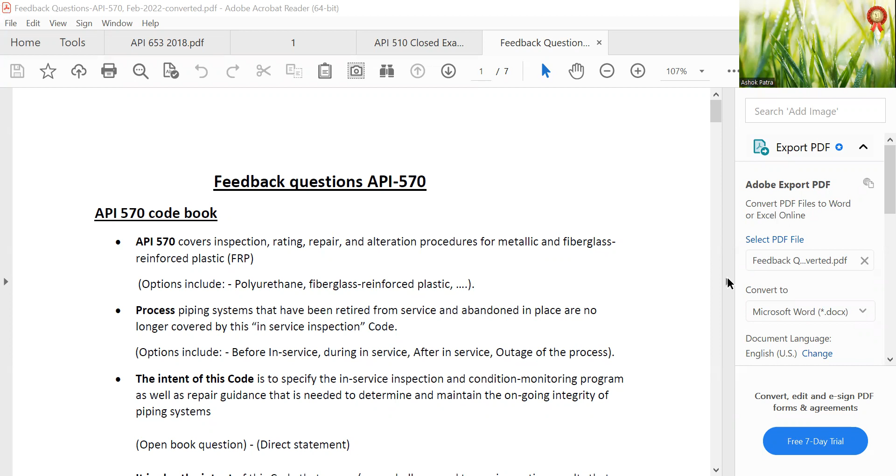API 570 covers inspection, rating, repair, and alteration procedures for metallic and fiberglass reinforced plastic piping. Options include polyurethane fiberglass reinforced plastic process piping systems that have been retired from service and abandoned in place are no longer covered by this in-service inspection code.

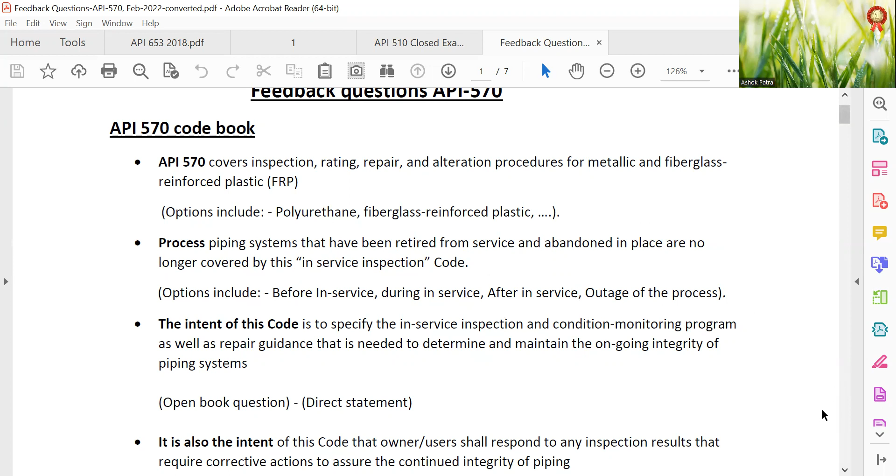Options include before in service, during in service, after in service, and outage of the process. The intent of this code is to specify the in-service inspection and condition monitoring program, as well as repair guidance needed to determine and maintain the ongoing integrity of the piping system.

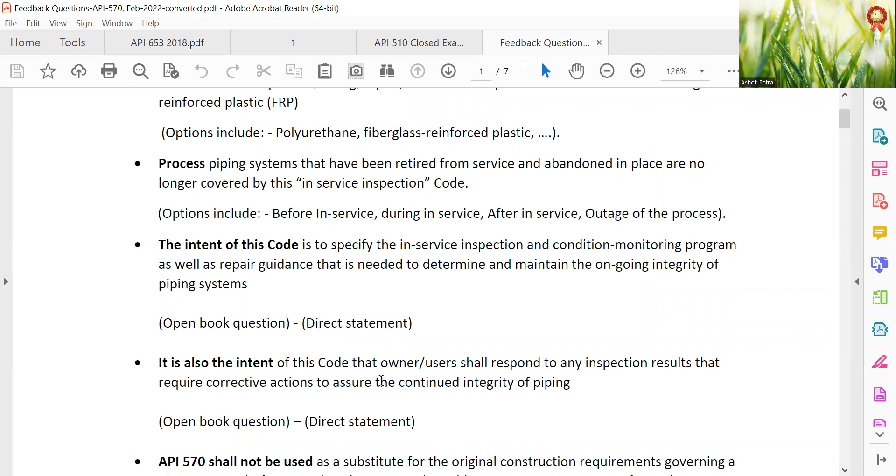Open book question, direct statement. It is also the intent of this code that the owner user shall respond to any inspection results that require corrective actions to assure the continued integrity of piping.

API 570 shall not be used as a substitute for the original construction requirements governing a piping system before it is placed in service. Possibly 2 or 3 questions in the same format. Options include ASME Section VIII-1 construction code, ASME PCC2, API 579-1 repair construction code, and B31.3 applicable construction code.

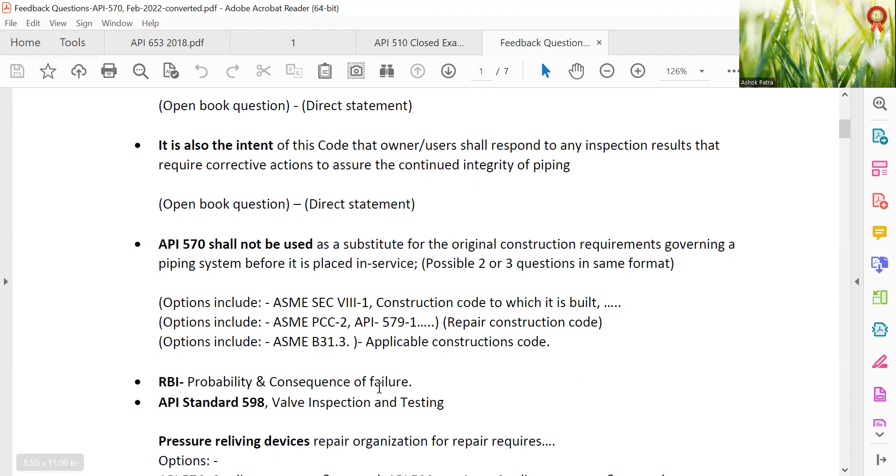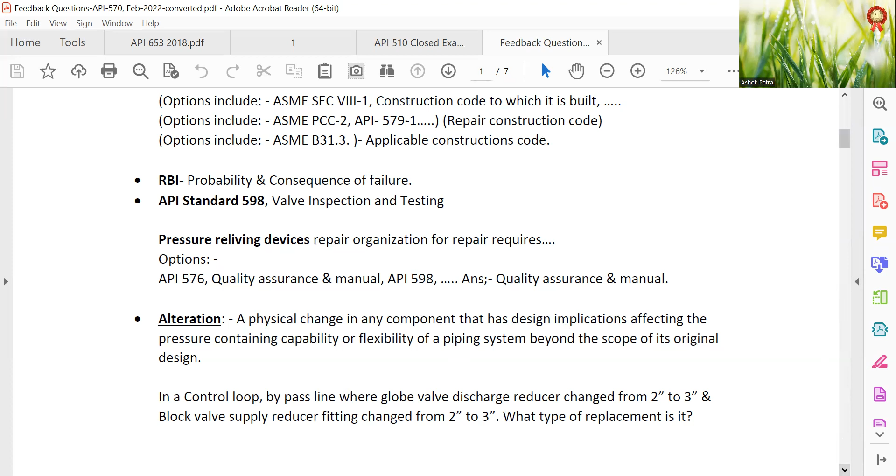Alteration is a physical change in any component that has design implications affecting the pressure containing capability or flexibility of the piping system beyond the scope of its original design. Example: in a control loop bypass line where a globe valve discharge reducer changes from 2 inch to 3 inch, and a block valve supply reducer fitting changes from 2 inch to 3 inch, what type of replacement is this? Options are repair, re-rating, or alteration. The answer is alteration.

For alloy material, we perform PMI of carbon steel in special cases for loss of resistance to corrosion, checking elements like sulfur, nitrogen, phosphorus, and chromium. The answer is chromium.

Abandoned in place: a temporary outage of the process fluid is not considered abandoned in place. Erosion corrosion observed - which of the following: overhead pipe of fractionator, or discharge of pump? The answer is overhead of fractionator.

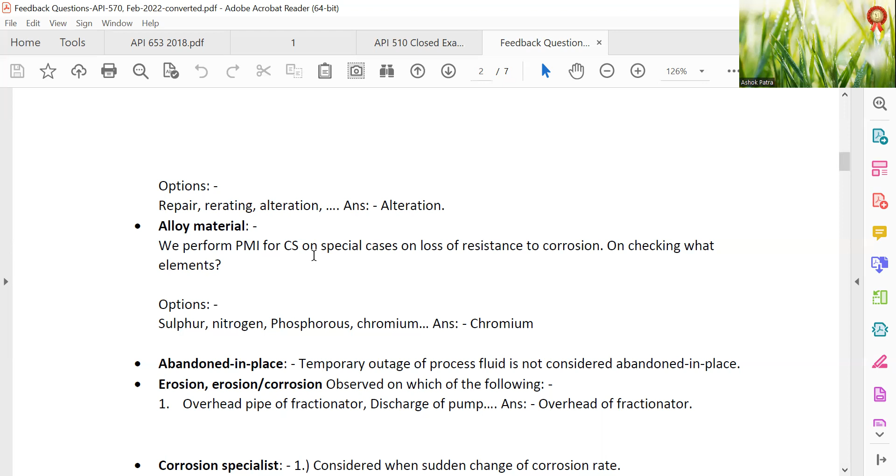Corrosion specialist is considered when there is a sudden change in corrosion rate or localized corrosion, such as corrosion under insulation or external chloride stress corrosion cracking of austenitic stainless steel. Suitable NDT methods include MPT for magnetic materials; austenitic stainless steel is diamagnetic. LPT is sensitive enough to detect surface cracks, while RT cannot detect cracks, so the answer is LPT.

Piping systems known to have a remaining life of over 10 years, or that are adequately protected against external corrosion, need not be included in the NDE inspection recommended. This is in table 2, a direct question.

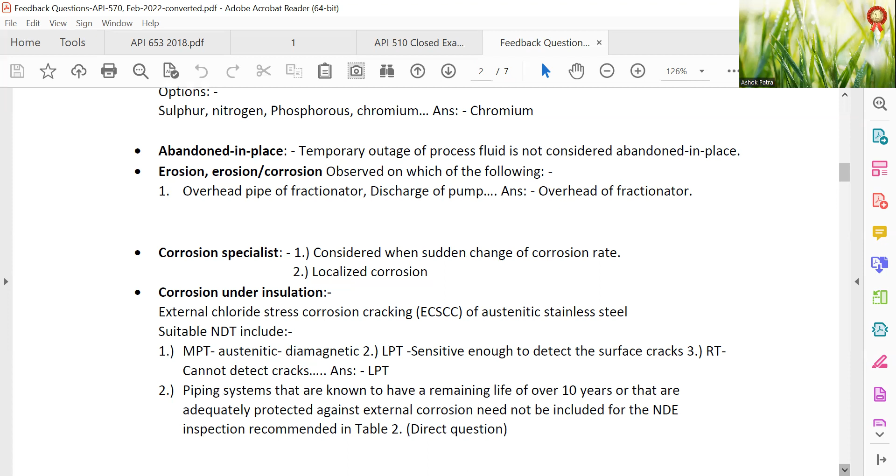API ASME 579-1, ASME FFS1 calculation applies in case of any repair.

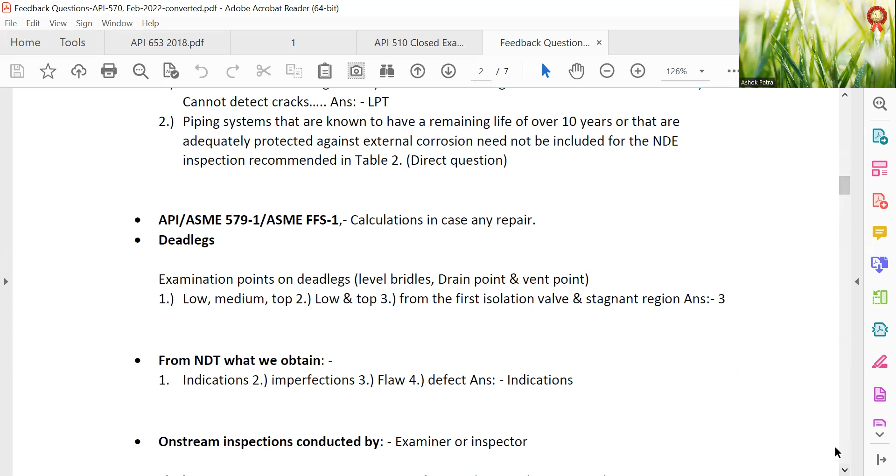From NDT, what do we obtain? Indication of imperfection, indication only. On-stream inspection is conducted by an examiner or inspector. Flash point minimum temperature required is 120 degrees Fahrenheit, or 49 degrees centigrade.

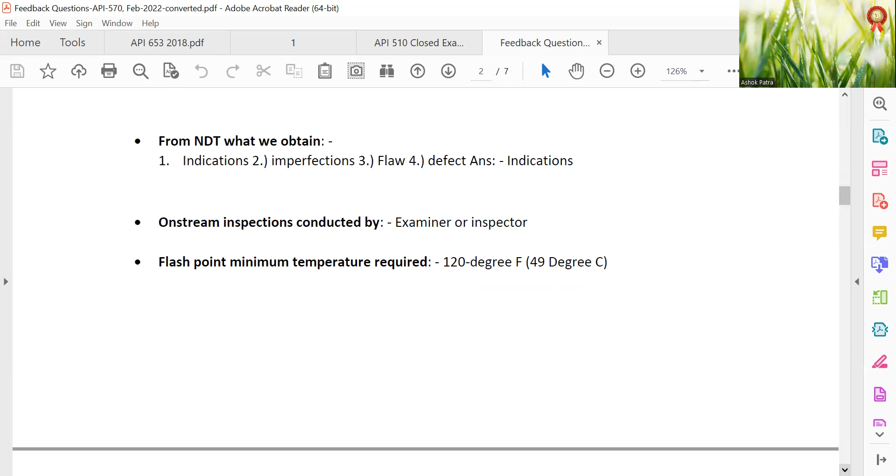An industry-qualified UT angle beam examiner is a person who possesses ultrasonic angle beam qualification from API QUTE or QUSE detection and sizing test, or an equivalent qualification approved by the owner user. This is a closed book question. Injection point upstream condition, 2 questions.

Calculation on condition: 12 inch or 3D, whichever is greater, for the upstream condition. Downstream condition 1 question: 25 feet, or 7.6 meters, beyond the first change of flow direction.

UT thickness reading is affected by lining present in the pipe.

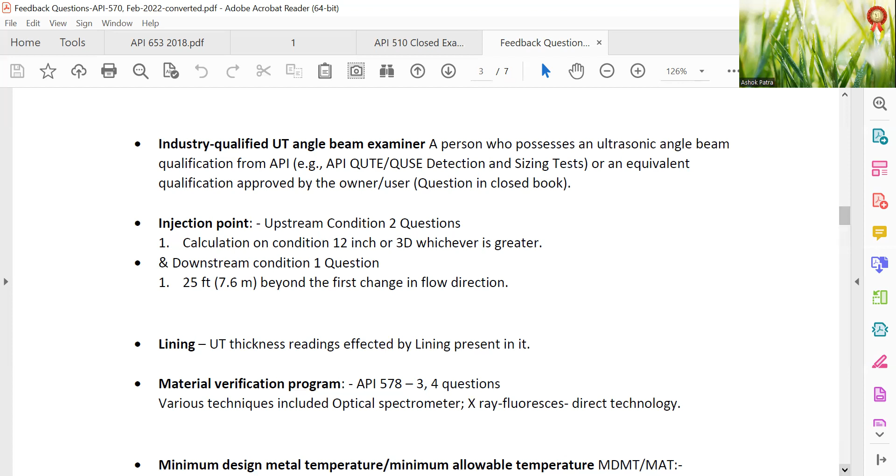Material verification program, API 578, 3-4 questions. Various techniques include optical spectrometer and X-ray fluorescent technology. Minimum design temperature, minimum allowable temperature, MDMT, design metal temperature - ASME B31.3, section 323.2.2, determining the temperature from the material grade and specification is given, 1-2 questions.

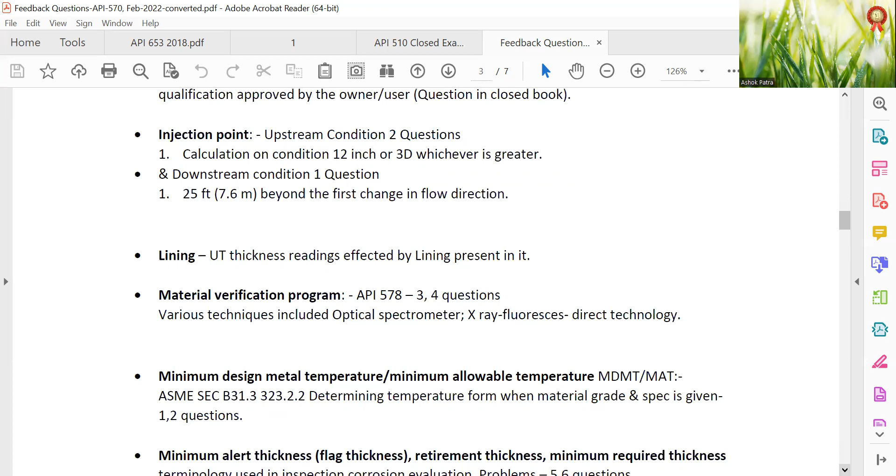Minimum alert thickness, flag thickness, retirement thickness, and minimum required thickness are terminology topics. Corrosion evaluation problems account for 5-6 questions, and post-weld heat treatment for 1-2 questions. A direct question: determine the temperature from material grade and specification.

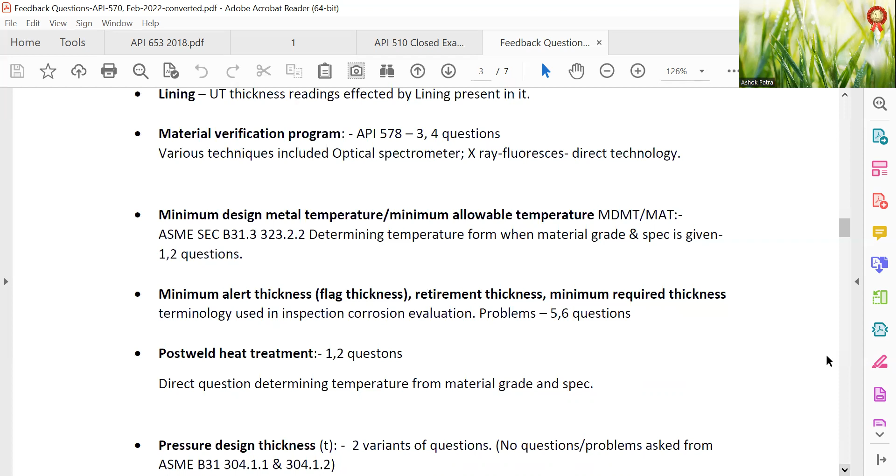Outside diameter is determined from API 574 using the pipe schedule chart. Joint efficiency is from table A1B, and allowable stress from table A1. Obtain the value of Ksi, multiply by 1000, and substitute to calculate T actual, T corrosion rate, and the inspection interval.

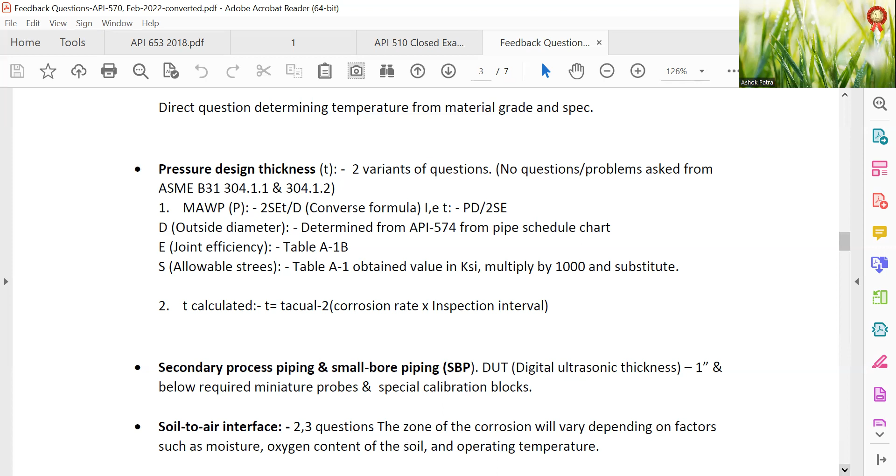Secondary process piping, small bore piping, SBP. Digital ultrasonic thickness, 1 inch and below require miniature probes, special calibration blocks, soil to air interface. Two, three questions from this: zone of corrosion will vary depending on factors such as moisture, oxygen content of the soil, and operating temperature.

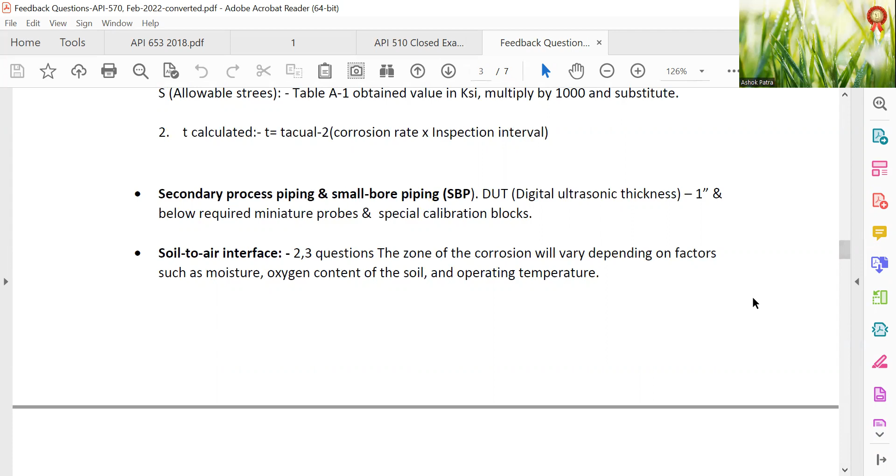Structural minimum thickness is just given to confuse in the problem. Repair can be scheduled and accomplished within the time period acceptable to the inspector and the piping engineer. Direct statement. Hardness testing, 1 square inch: how many values? Answer 6.

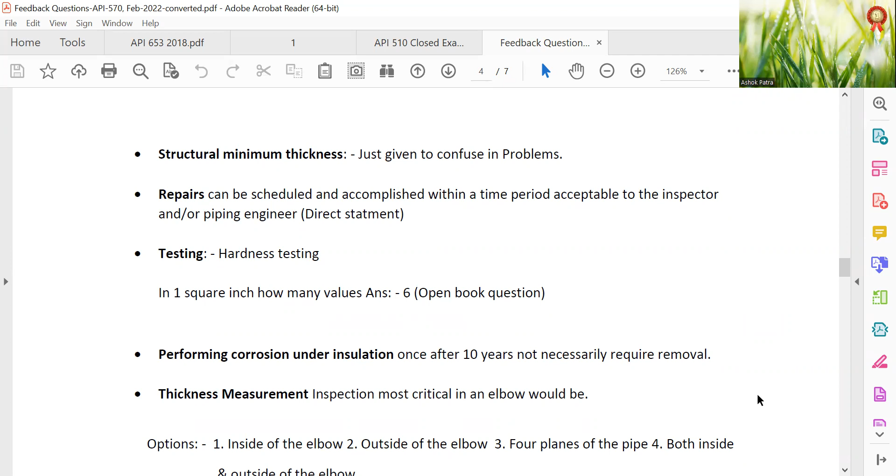Performing corrosion under insulation: once after 10 years, not necessarily requiring removal. Thickness measurement inspection most critical in an elbow would be inside of elbow, outside: 4 planes of the pipe, both inside and outside of the elbow. The inspector should consult with a corrosion specialist when the short-term corrosion rate changes significantly. Direct question.

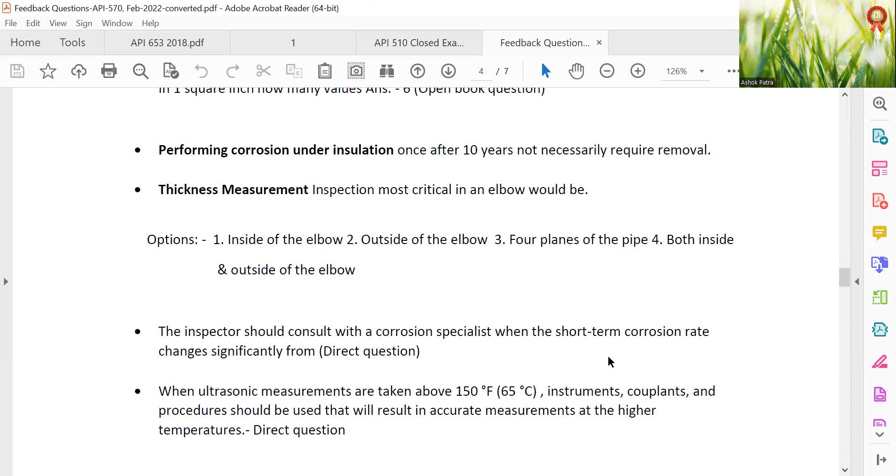For ultrasonic measurements taken above 150 degrees Fahrenheit, 65 degrees centigrade, an instrument, couplant and procedure should be used that will result in accurate measurements at the higher temperature. Direct question.

Magnetic particle examination, ASME BPVC Section V, Article 7; liquid penetrant exam, ASME BPVC Section V, Article 6; RT, ASME BPVC Section V, Article 2; ultrasonic flaw detection, ASME BPVC Section V, Article 4, Article 5, Article 23. Substituting NDE procedures for a pressure test after an alteration is allowed only after the engineer and inspector have approved the substitution. Direct question.

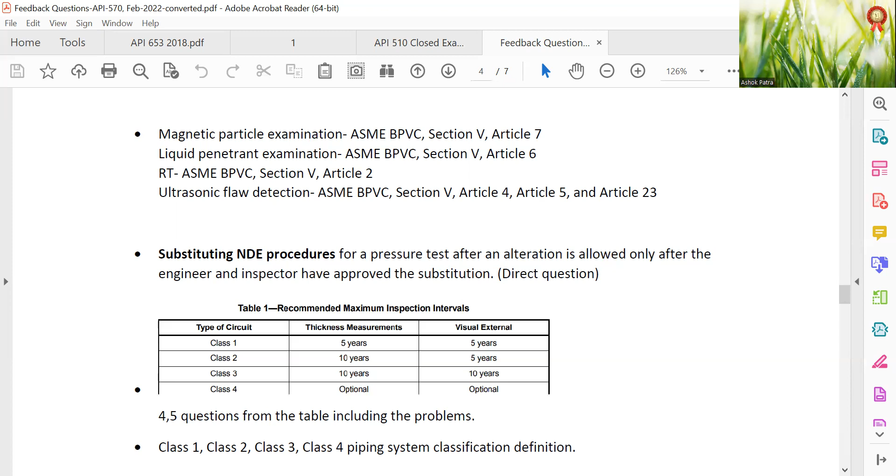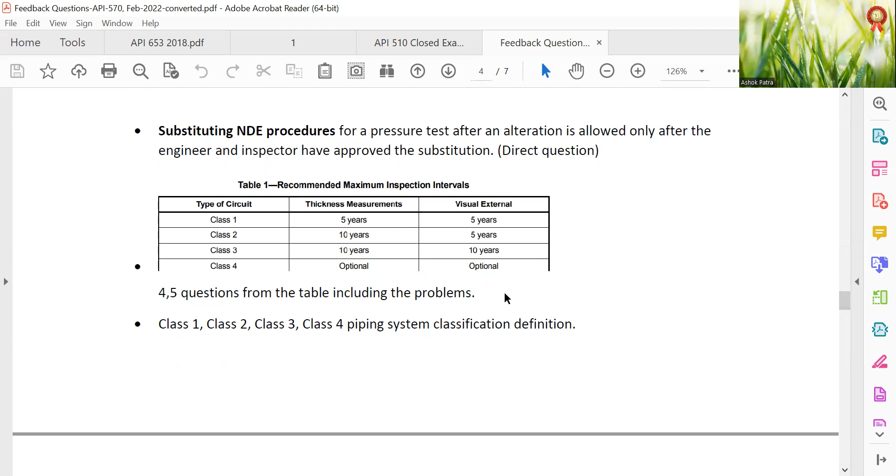Four or five questions from the table, including the problem. Class 1, Class 2, Class 3, Class 4 piping system classification definition. Class 3: on-site hydrocarbons that will not significantly vaporize during the release, such as those operating below the flash point. Direct question. Drag and drop type question. In such options there are changes in pipe class.

Anhydrous hydrogen, on-site natural gas, off-site hydrogen or natural gas, nitrogen, hydrogen sulfide. The above is subject to change, just for example; it is really quite confusing and should be carefully assessed.

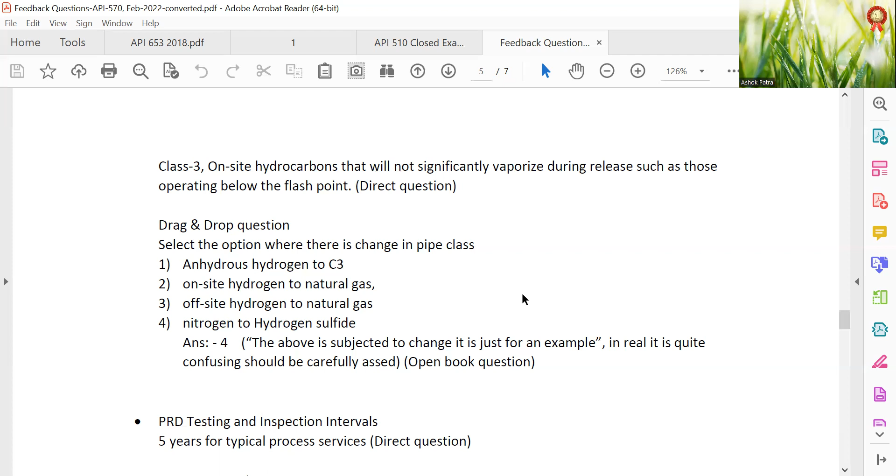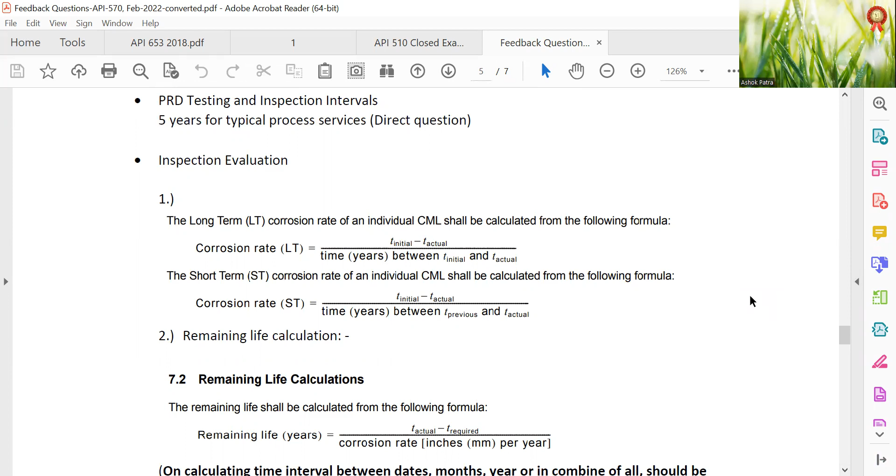PRD testing and inspection intervals: 5 years for typical process service. Direct question. Inspection evaluation: long-term, short-term corrosion rate, remaining life calculation, required thickness determination, RCA, required corrosion allowance. The repair area is localized, for example, pitting or pinholes, and the SMYS of the pipe is not more than 40,000 psi. Direct question.

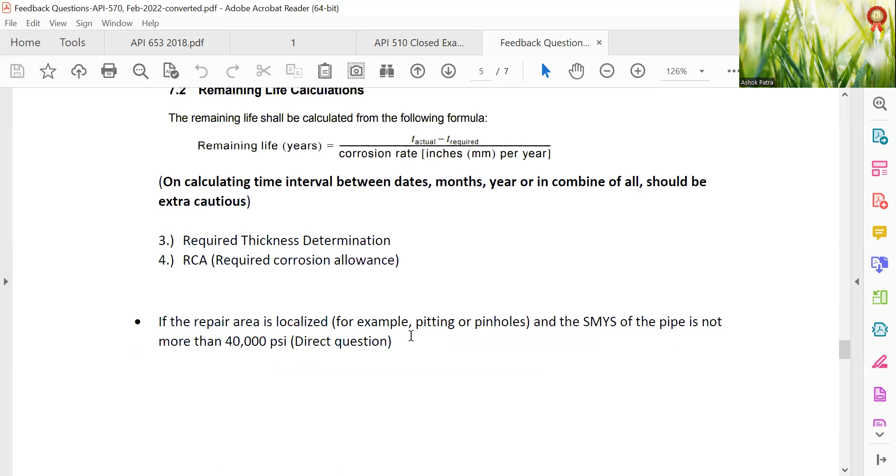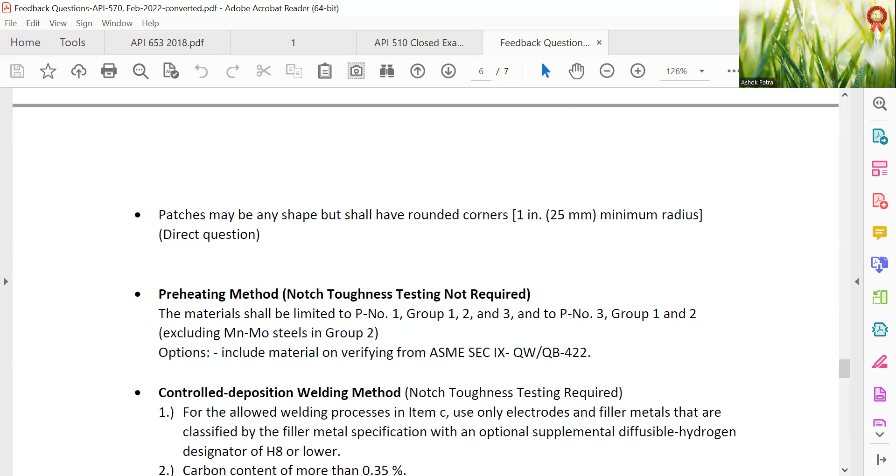Patches may be any shape, but shall have rounded corners, 1 inch, 25 mm, minimum radius. Preheating method, notch toughness testing not required. The materials shall be limited to P-No. 1, Group 1, 2, 3, and P-No. 3, Group 1, 2, excluding Mn-Mo steels in Group 2. Include material verification per ASME Section IX, QW-422.

I don't think this P-No. 3, Group 1, 2. This, okay, P-No. 1, Group 1, 2, 3, okay. Controlled deposition welding method: notch toughness testing required for the allowed welding process in item C. Use only electrodes and filler metals that are classified by the filler metal specification with an optional supplemental diffusible hydrogen designator of H8 or lower.

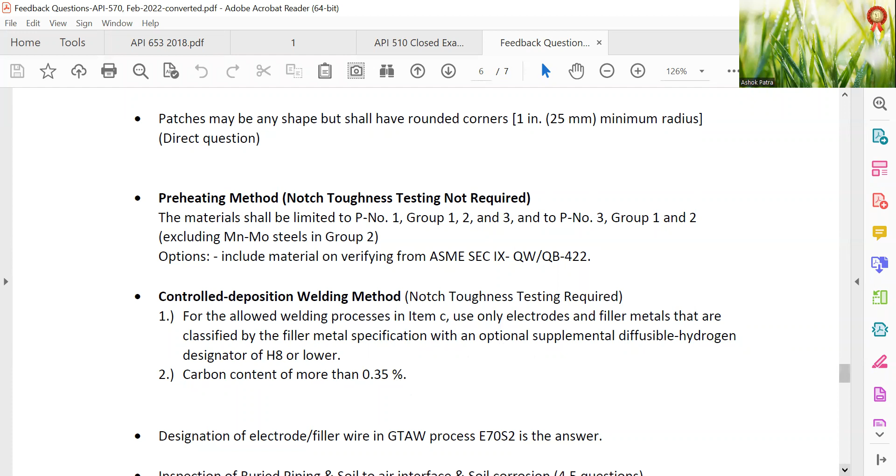Carbon content more than 0.35%. Designation of electrode filler wire for GTAW process: E70S-2.

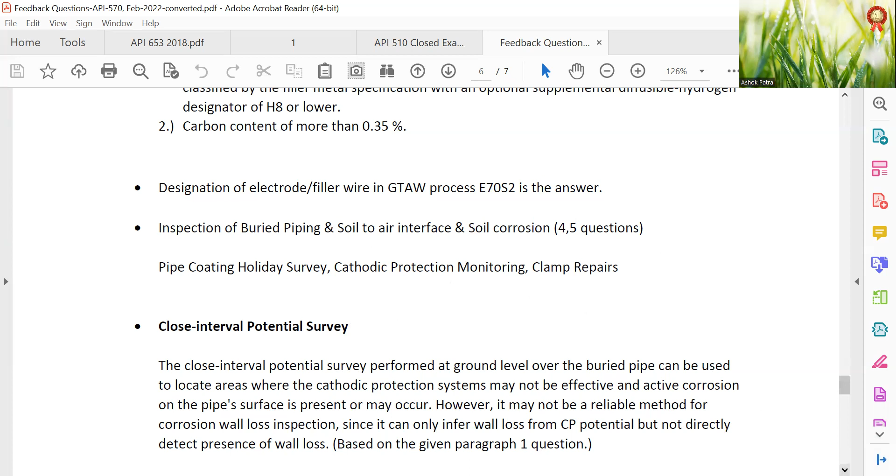Inspection of buried piping, soil to air interface, soil corrosion, 4-5 questions. Pipe coating holiday survey, cathodic protection monitoring, clamp repairs. Close interval potential survey: the close interval potential survey performed at ground level over the buried pipe can be used to locate areas where the cathodic protection system may not be effective and active corrosion on the pipe surface is present or may occur. However, it may not be a reliable method for corrosion wall loss inspection since it can only infer wall loss from CP potential but not directly detect the presence of wall loss.

Okay, the close interval potential survey may not be a reliable method for corrosion wall loss inspection. It is used to locate the areas where the cathodic protection system may not be effective and active corrosion on the pipe surface is present or may occur.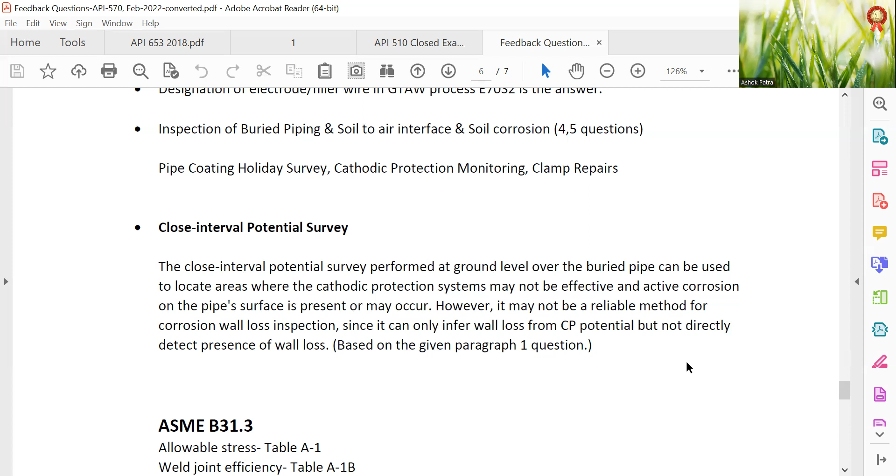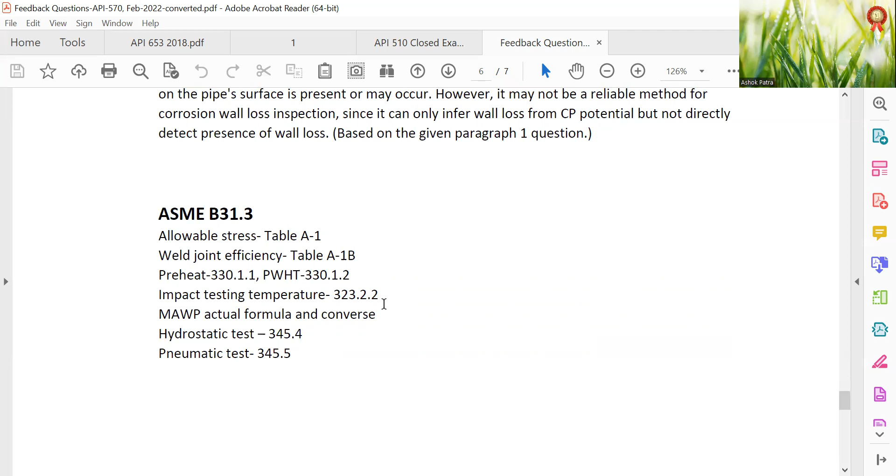Allowable stress Table A-1, weld joint efficiency Table A-1B, preheat 330.1.1, PWHT 330.1.2, impact testing temperature 323.2.2, MAWP actual formula and converse, hydro test 345.4, pneumatic test 345.5.

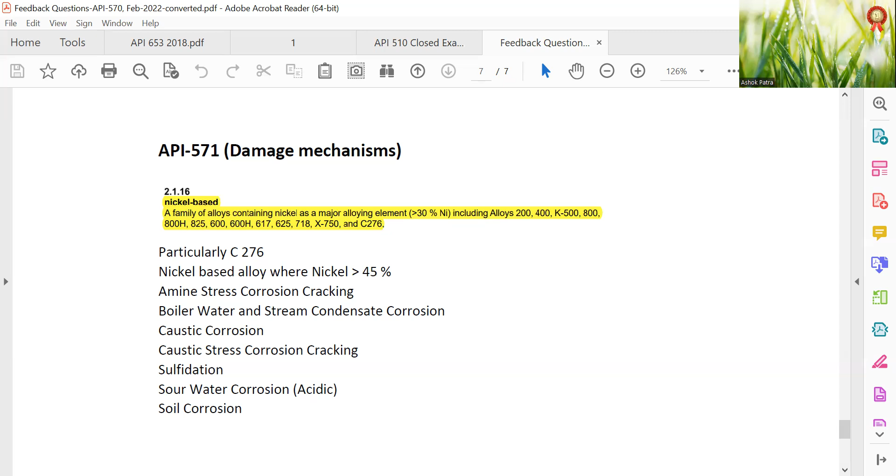API 571 damage mechanisms, nickel based: a family of alloys containing nickel as the major alloying element, greater than 30% nickel, including alloys 200, 400, K-500, 800, 800H, 825, 600, 600H, 617, 625, 718, X-750 and C276, particularly C276, nickel based alloy where nickel is greater than 45%. Amine stress corrosion cracking, boiler water and steam condensate corrosion, caustic stress corrosion cracking, sulfidation, sour water corrosion (acidic), soil corrosion.

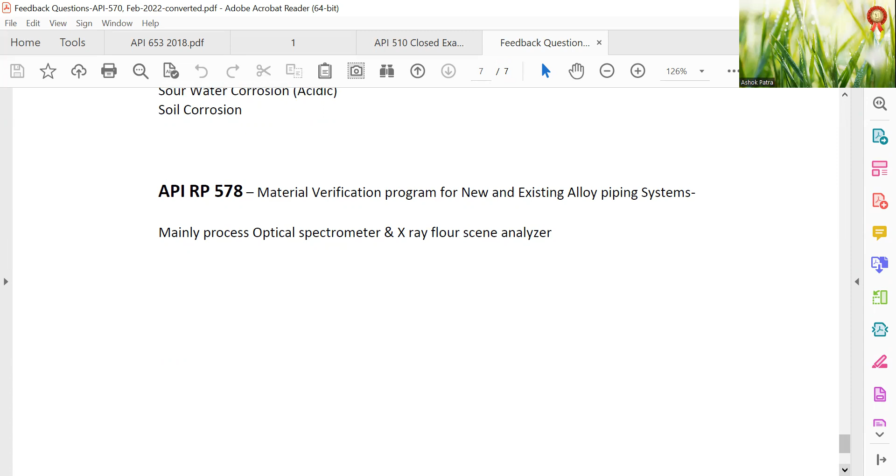API RP 578 material verification program for new and existing alloy piping systems, mainly optical emission spectrometer, X-ray fluorescence analyzer. I'll stop here.